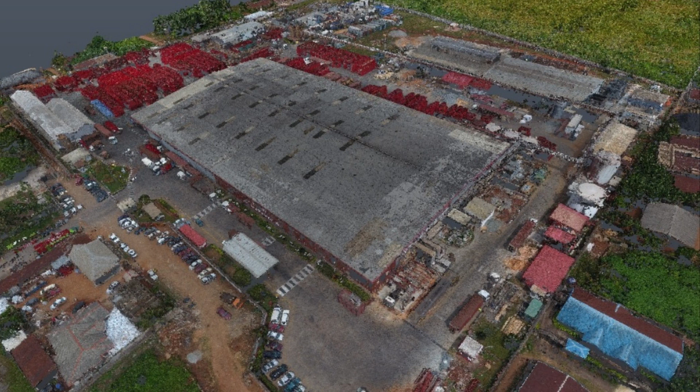The topic of this discussion is a practical BIM workflow for large-scale infrastructure projects in a pandemic situation. And we are using the Lagos to Abidjan highway corridor as a case study. Okay, so

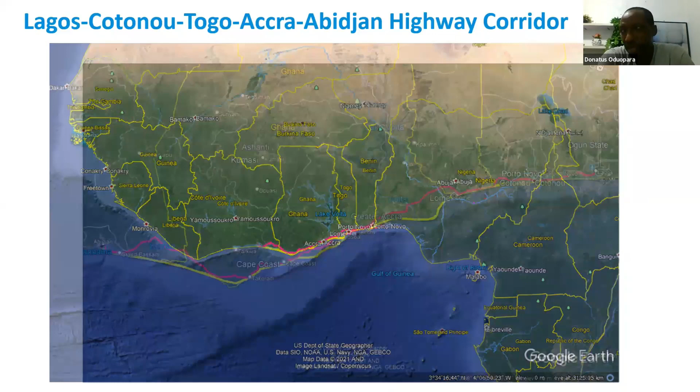Now, the emphasis here is using a method where you can stay in your office and acquire data that you can use to do the preliminary planning, without really getting to sites, after the pandemic that has hit the whole world. So we'll be exploring that. Now, to bring the method into a form that everybody will understand, I have a video that I would like us to look at.

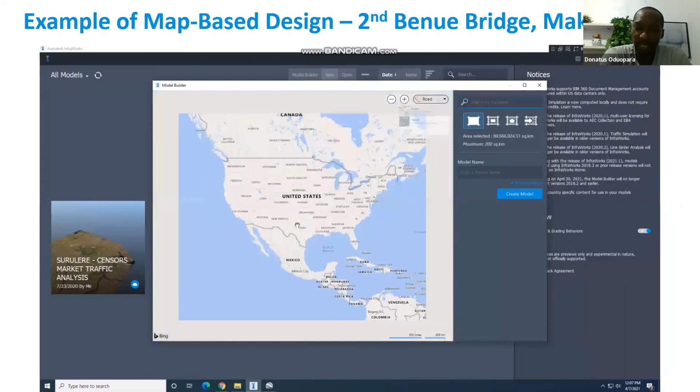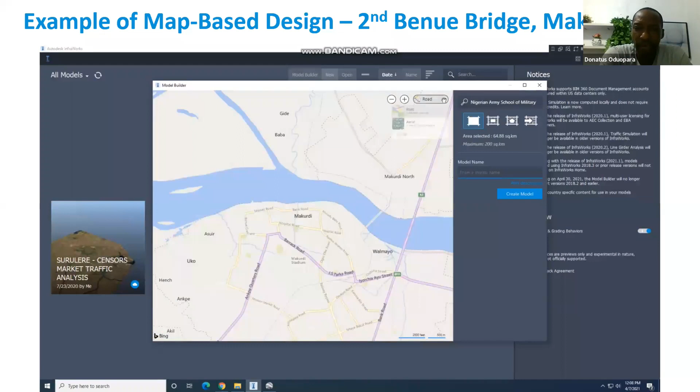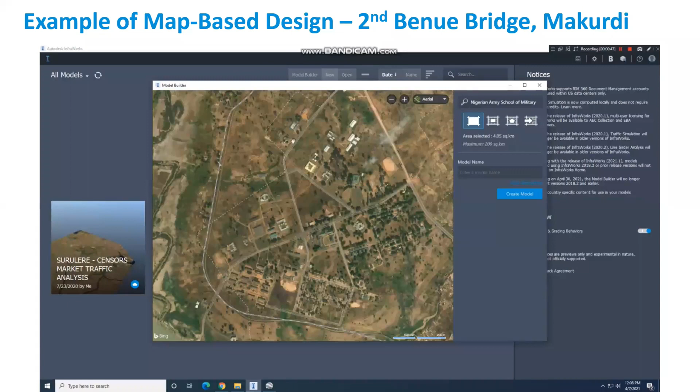So what you are looking at, the software, I will get deep into it in the course of this discussion, but this is InfraWorks from Autodesk. Now you are looking at a map-based solution, and the map you are looking at is captured around Makurdi in Benue State. And the objective is to create an alternative bridge that I will call the Second Benue Bridge in Makurdi.

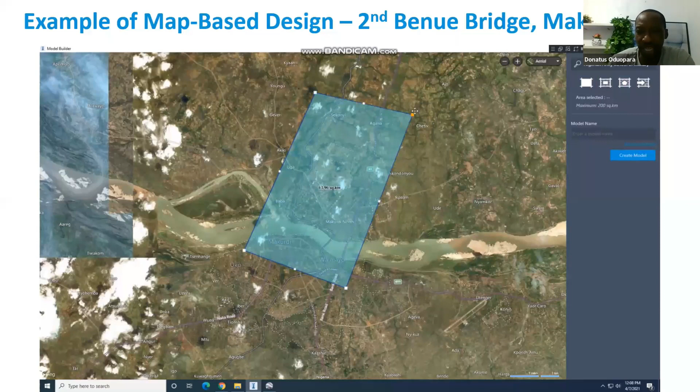So I pulled this from a presentation I made to the Nigerian Army. I used their environment, the Nigerian Army School of Military Engineering in Makurdi, to bring home what we were presenting to them. So I pulled it to explain this process in a way that we all will understand.

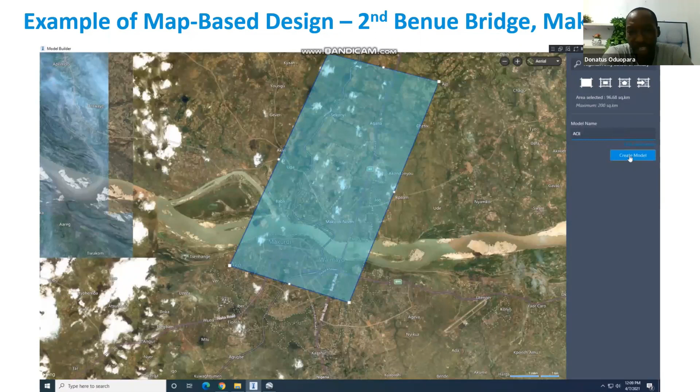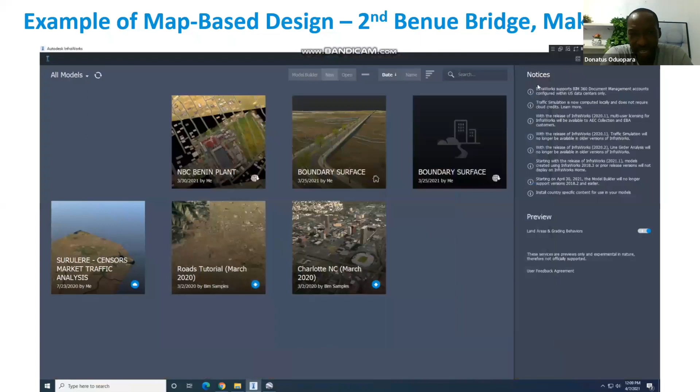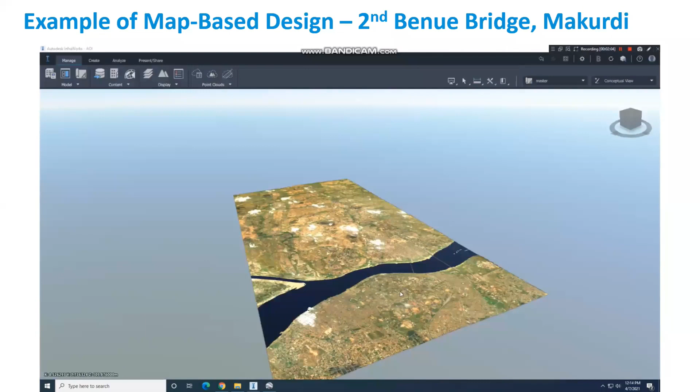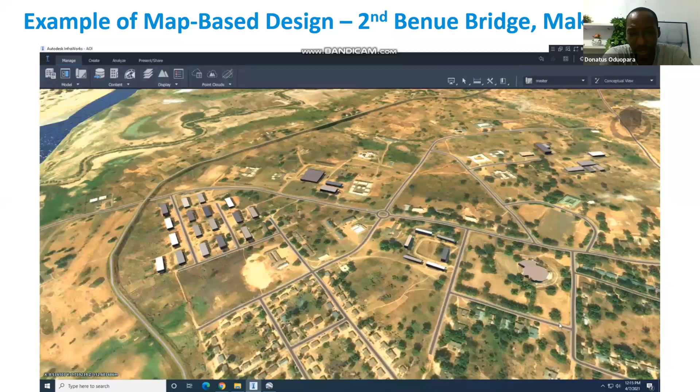If you look very closely, you will see that I am working on a map. Anybody that understands Makurdi very well will know that the map captured virtually all the existing road infrastructure in Makurdi, the railway line that passed through, and the River Benue itself was also captured. You will be seeing how the road was created and all the features that you need to put in the road.

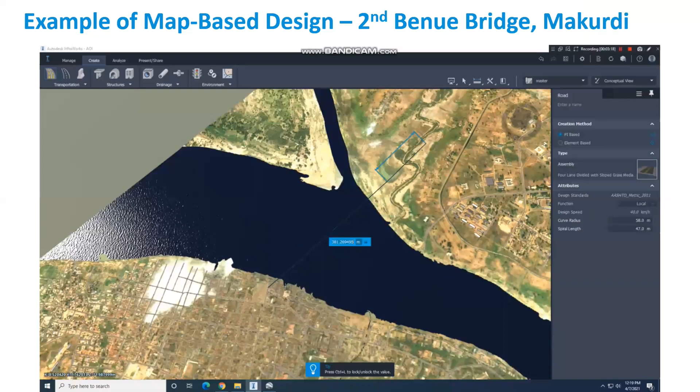By the way, this video was not edited, it was not shortened in any way. So the length of time it took to prepare this was exactly the length of time it takes. So just to give you an idea of the time and the speed of this process.

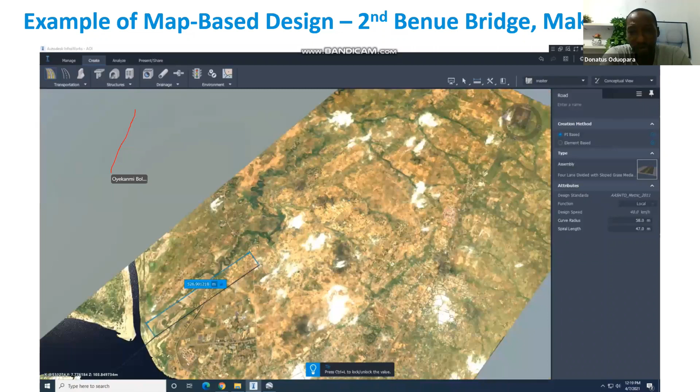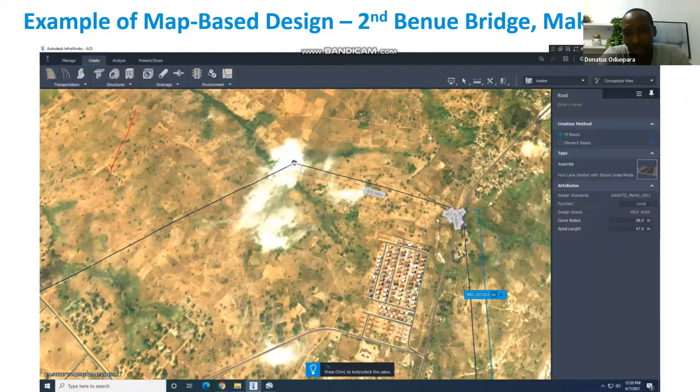So you see lines drawn from the starting point to an end point. This end point is the existing Makurdi to Lafia Road highway. So this software has captured the existing road infrastructure, and the new road that we are creating will tie to it seamlessly. Because it's coming at the same level, it's created a junction. Now you can do so many things with it.

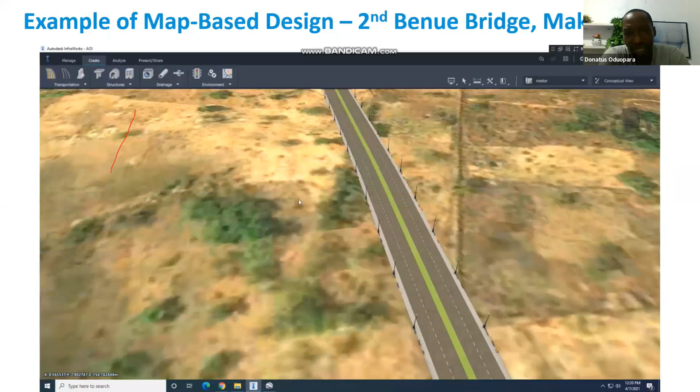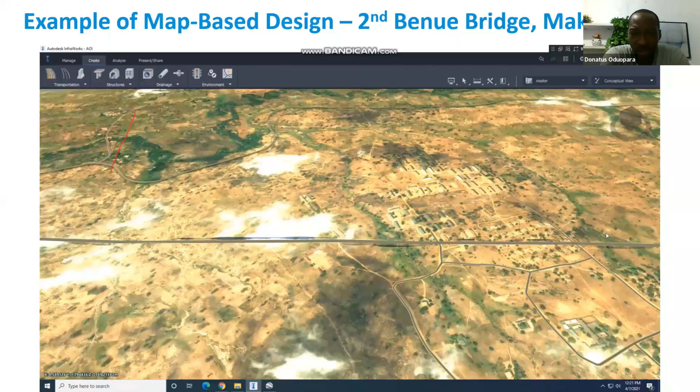The profile that we picked has a street light and other features attached to it. So it comes automatically, and you can see areas where you need to do cut and areas where you need to do fill. You can calculate your cut and fill quantities. Where we have the railway, the elevation of the railway is much higher than the elevation of the road. So the road passed under the railway. So you will see how we treated it.

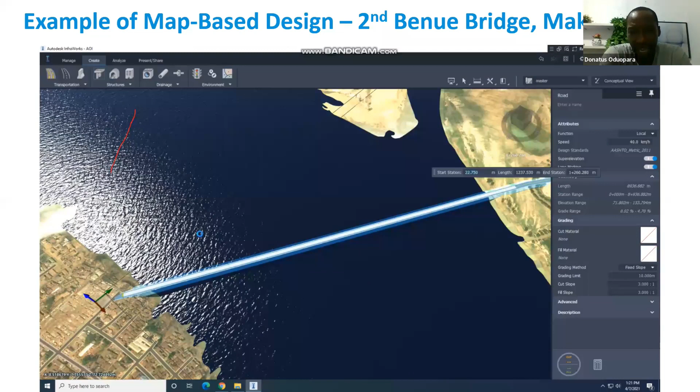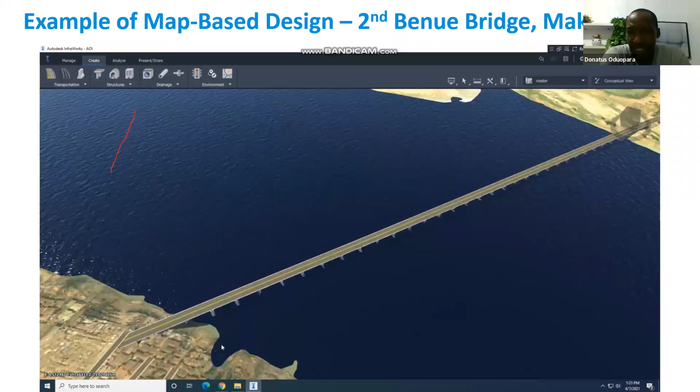Now we are creating a bridge across River Benue. By a very simple process, you create a bridge that has engineering features. Even though it's not the final design, you will still take it to another software for detailed design. But you can see how the bridge has been created. Now, remember, I didn't go to site. Nobody went to site to obtain any information. We were able to do all this.

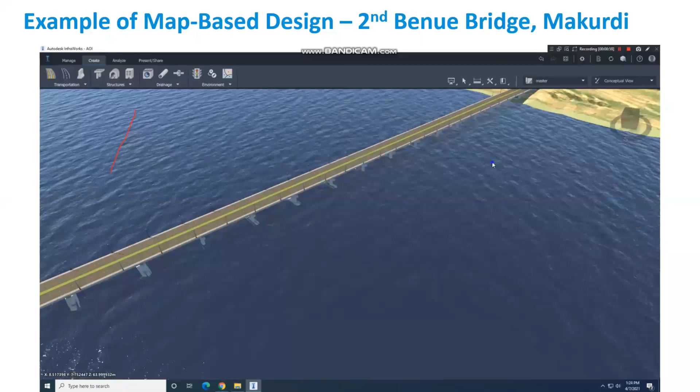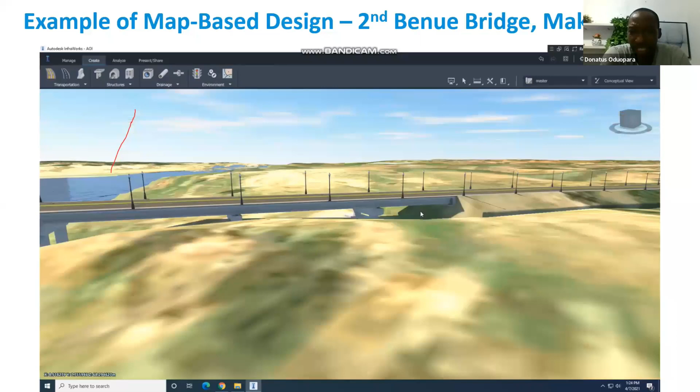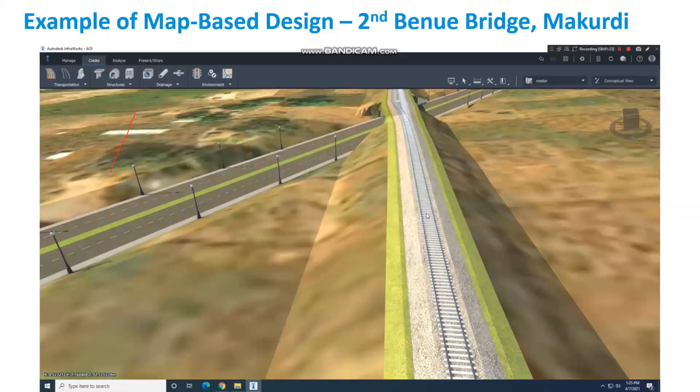This can apply to any part of the world, so long as you have a map of that place, which automatically comes with the software. So you have all the features, the piers, the abutment, and all the things that you need. This can be modified. The elevation can be changed. You can do a whole lot with it. As I mentioned, you can see the bridge and the existing railway line. Now, because the road is coming under the railway, we are going to create a tunnel so that the railway will pass above it.

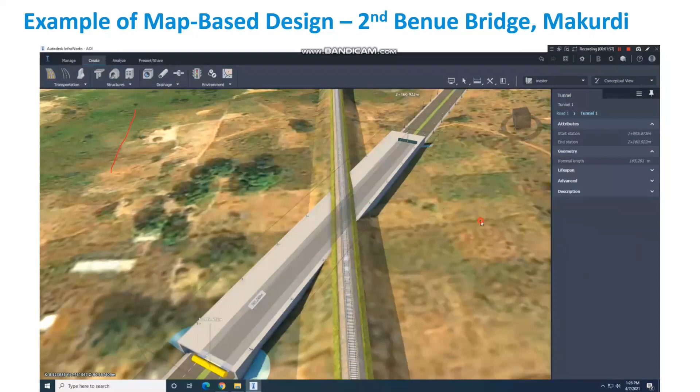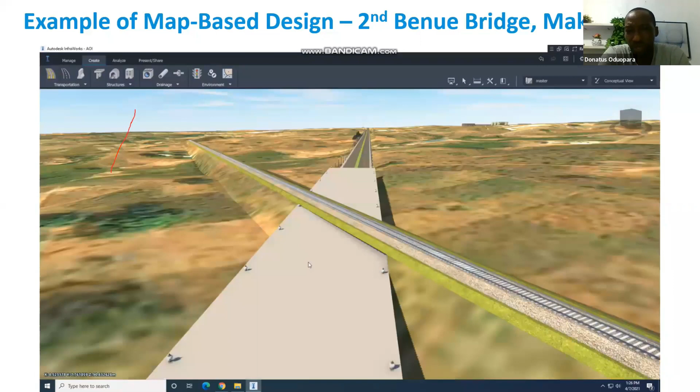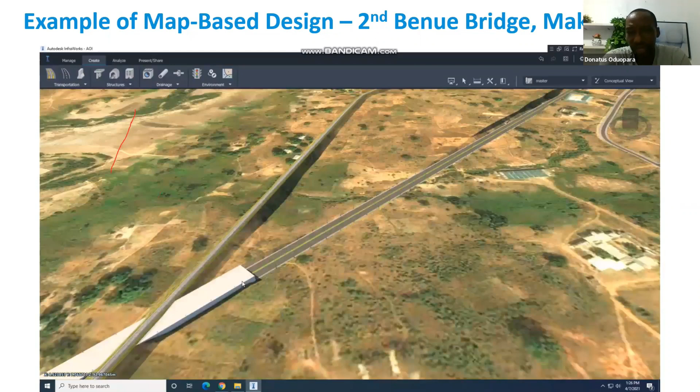And like I said, with all that we have created, you can extract your quantities and check. If you do a number of options, and that is the beauty of this discussion, that you can do as many options as possible, you can now do a quick check and do a cost benefit analysis to know which route will serve best in that situation. So this is the software that we'll be looking at in the course of this discussion, particularly for our case study.

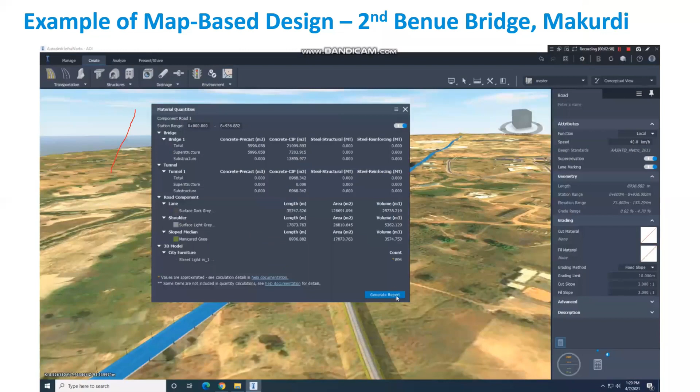So what is displayed here are basic quantities that you can pass to the quantity surveyors, and they will quickly give you some preliminary costing that will let you know if the option that you have chosen is economical. So moving on, I said this is a BIM workflow. So it is important for us to understand what BIM is. BIM is an acronym for Building Information Modeling.

Building Information Modeling, BIM, is a process that encompasses all aspects, disciplines, and systems of a facility within a single visual model that allows all stakeholders to collaborate more accurately and efficiently than the traditional process. As you will get to see in this discussion, if you are implementing BIM, there is always collaboration with all stakeholders, irrespective of your background, irrespective of your qualification. So there are features in BIM that will enable everybody to make his input at every stage of the project.

So by the way, the BIM process starts from the conceptual stage and runs throughout the lifespan of the project. So it goes into the construction stage, the post-construction stage, even at the expiry of the lifespan of the project. If you need to decommission it or to demolish it, as the case may be, BIM can be applied, because you have the model that has all the information regarding that project.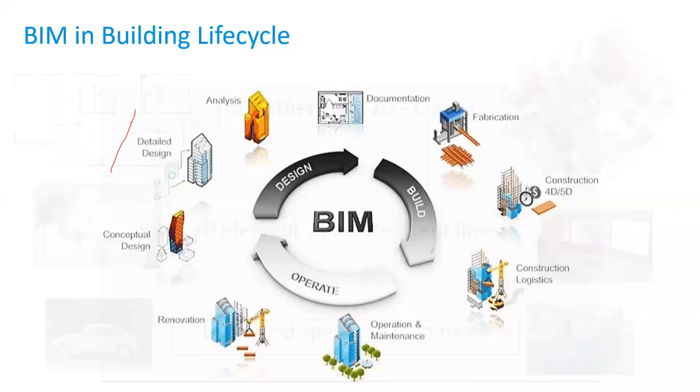So we can also explain BIM using the building life cycle or project life cycle, that you have the design phase, the execution phase, and the operational phase. All will revolve around BIM. Now, for us to appreciate what BIM is very well, let's look at some of the benefits of BIM. In BIM, you deal with 3D models as against 2D drawings that you manage in the traditional method. Even though this has brought some misunderstanding, that when somebody is doing 3D modeling, he will assume he's doing BIM. That is not very correct. But you cannot do BIM successfully without 3D modeling.

That's how it is. So if you look at the image on your right, you will understand what is in the building. So if you are presenting this to a client, the client will have clear understanding. If by mistake you have provided a column in his bedroom, he's not going to allow it, because he will see it and ask you questions. Why do I have a column in my bedroom? I don't want it. And you can manage it better at the early stages.

But if you just leave it as a dot, in the case of 2D, if you are dealing with a non-technical client who does not understand what those lines and the information you have in the drawings represent, he will come to site when you have finished the construction and tell you that he doesn't want this. And at that point, there's nothing you can do than to start to manage it. And that will lead to delay and also cost overrun.

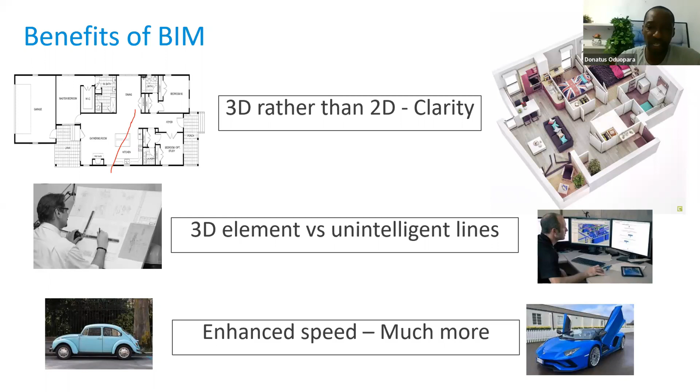Another thing is coordination. If you have a project that has so many professionals, mechanical, electrical, architect, and all other professionals, by the time everybody is bringing his own information, there is need for coordination. If you are doing that coordination with 2D drafting, 2D drawings, I promise you that even after your thorough job, you will still go to site and end up with clashes, arguments. The electrical requesting the structural to allow him to break his beams, and the structural resisting it. And this can cause delays on projects.

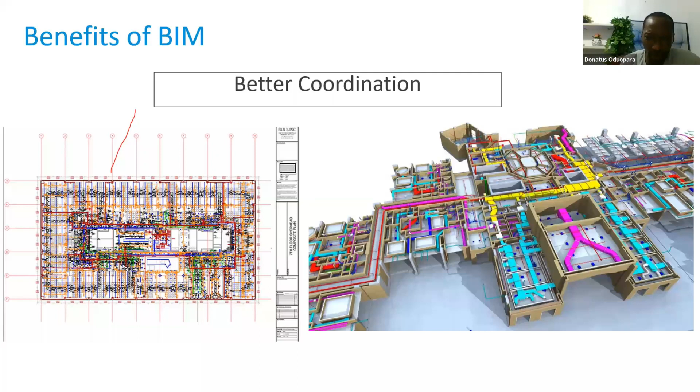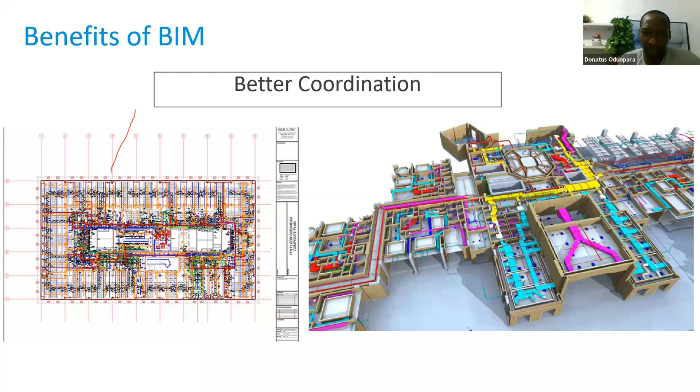In the BIM process, everything is clear, as shown on the image on the right. You can see the HVAC and all the features associated with that building. If there is any clash, there are tools you can use to run clash detection, and you will detect them and inform the people that are responsible to adjust them before you go to site. That saves a whole lot of time. That is about coordination. How about collaboration?

What happens in a non-BIM process is that architects will finish their design in silo. That means they are working exclusively in their own space. When they finish, they send it to other professionals to start their own. And they create their own, roll it back to the architect to coordinate. And you know all the issues that we face.

In the BIM process, you collaborate in real time. Real time in the sense that when the architect finishes modeling, other professionals can come in and start to work on the same model. So because you're working on the same model, there is less likelihood that you will make a mistake or do something that is outside what the architect has created.

So the point here is that you have one single source of truth. Only one model will be created. From the beginning of the project to the end of the project, at no time will another model be created by anybody, single model. But that does not mean you will not have modifications. You can have modifications and changes, but for every modification, you'll be working with the latest version of that model. And that is the single model that will be available for all the professionals to use.

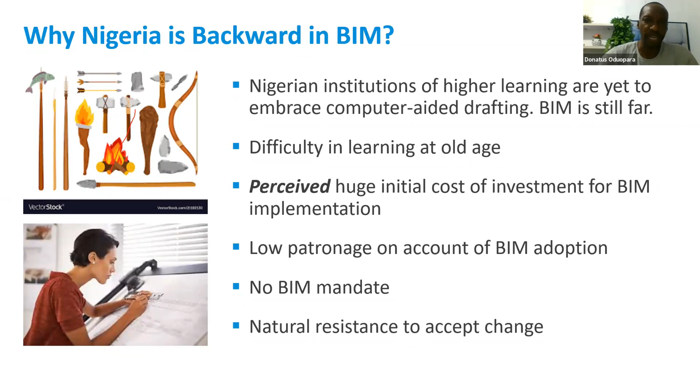Now we are going into very serious discussions, and I would like to emphasize that all the digital construction solutions that are in town are not for special people. They are for you, they are for me, they are for everybody, they are for us. And the thing is that we have to condition our mind to preach against piracy. Piracy causes a problem, a big one for that matter. You can buy AutoCAD for 5,000 naira from Computer Village and you are using it. But the truth is that you are using less than 1% of the functionality of AutoCAD, and as such, you will not maximize the benefit.

If you invest in licensed software, let's say from Autodesk, or as a matter of fact from any developer, that developer will make sure that you get the latest information, you get everything that is important about that software, including support. So when you are getting support, no matter the kind of problem you are handling, you will never fail in delivering it, no matter how big it looks.

Most of us know AutoCAD, but most people do not know Autodesk. Simply, what it means is that you have not related well to Autodesk. This applies to any other developer. It's not only Autodesk. It's a common problem here, and it's something that we all need to try to fight against at every opportunity we have.

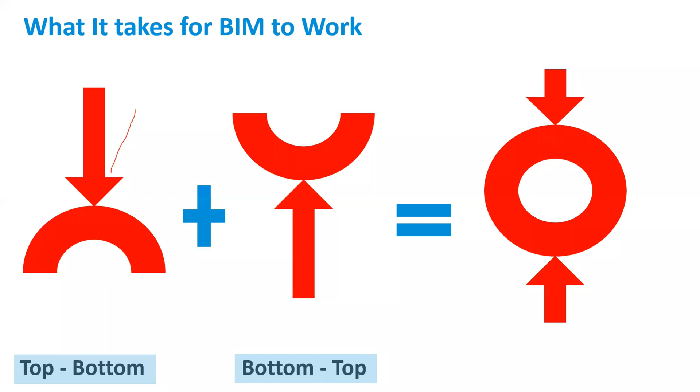As I have said before, without data, you cannot implement BIM. So let's discuss some sources of data for BIM implementation. One huge source of data is the internet. From the internet, you can pull data from different sources, some GIS platforms, and from the manufacturers of equipment and products that have created models. You can download and use it in your modeling.

Then you have the GIS, but both internet and GIS sources may not be current to the time this data were acquired. So for you to have up-to-date data, you need to deploy things like drones or 3D laser scanners to go to site and acquire current, up-to-date information that you can now use to replace whatever you have used for your preliminary design.

Co-host, I think you may have to help mute some people. I am doing that, sir. Okay, thank you. I am doing that as I am looking at the presentation.

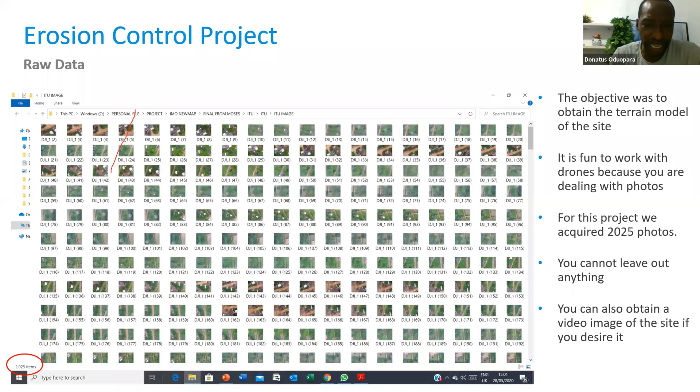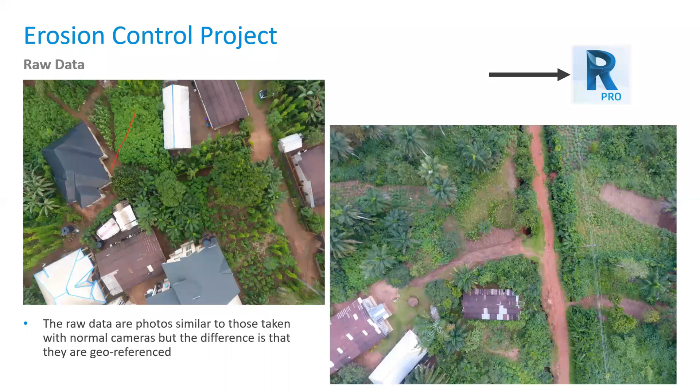So what you are looking at here is a drone that we flew somewhere, we acquired data, and all the data were processed to give you this. The raw data just looks like normal pictures, but it's georeferenced. And when you process it, it will be integrated into a 3D model, something like this. It will be like a map, and every information you need geometrically will be embedded in it.

So we are still using Autodesk solutions. Here we use Recap, I mentioned it before. Recap Pro is a tool that you can use to process drone data. By the way, it is the same drone that photographers are using, the one they use to cover events. You can deploy it on your project, use Autodesk Recap Pro to process it for engineering use. So that's what you are looking at.

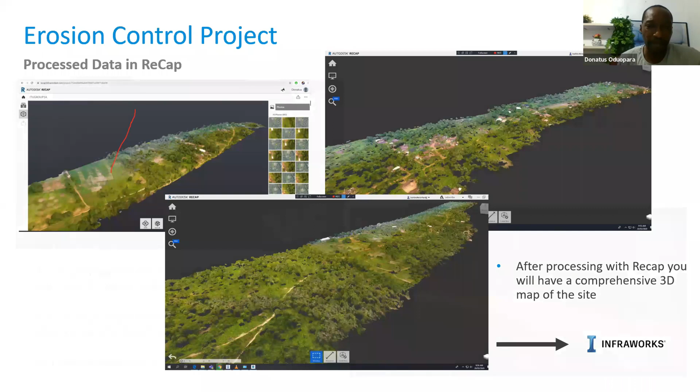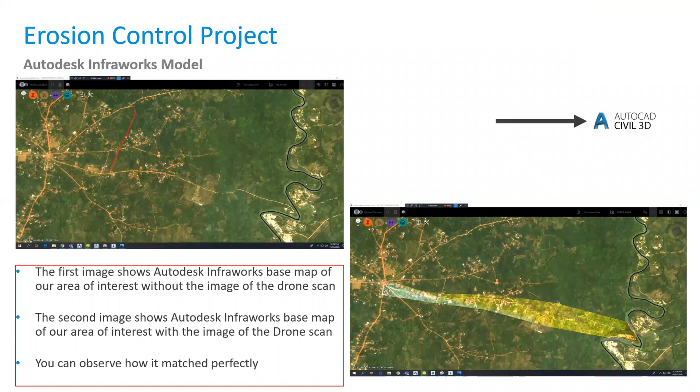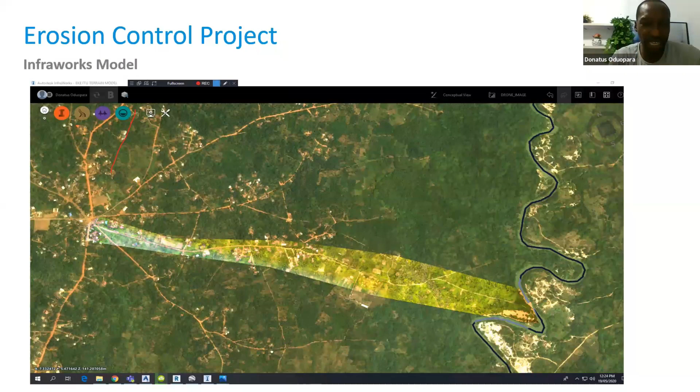So what you have here now is as existing as at the time the drone was flown. With this, you will do everything that you need to do, cut your sections, your profiles, and all that. Anybody that has somebody from Imo State, you have the Imo River on your right, and there is a place called Itu Junction, so the Imo River is on the right and Itu Junction is on the left. Now, if you process it, you can take it into Civil 3D to cut profiles, to do all the necessary engineering designs that you need to do. You have your data to do it.

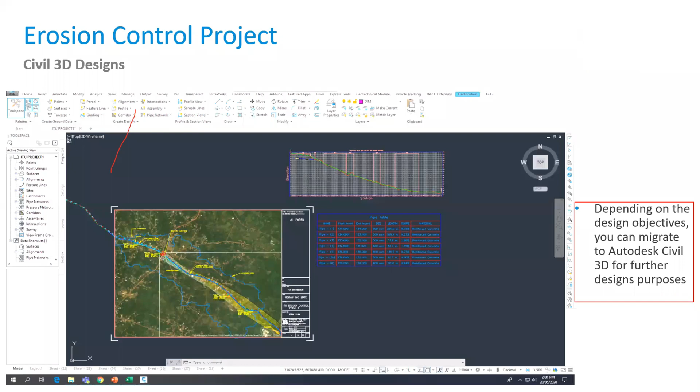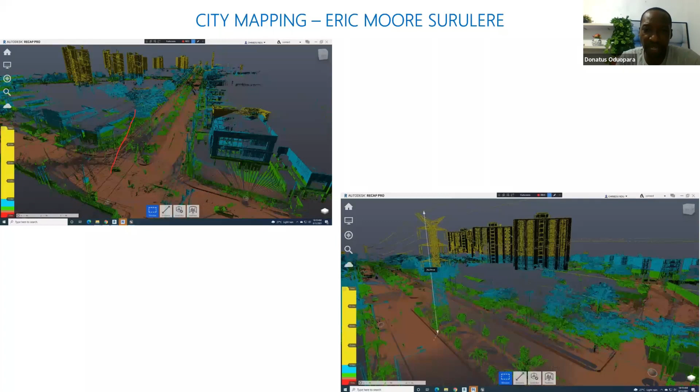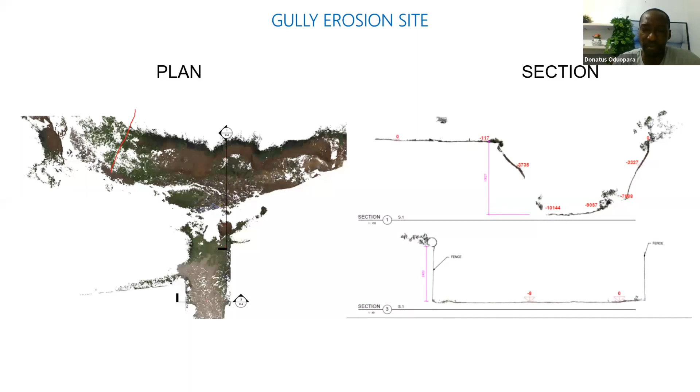So now, I've talked so much about BIM, but why is it that most people that started BIM leave it midway? They hardly get to the end, they hardly implement it. And every year you're talking about BIM. So we've identified some of the problems that we call pitfalls. And number one of them is trying to know the end from the beginning.

BIM is as large as technology. Just like you are discussing technology, you want to know what technology is, you will discuss endlessly still without getting to the end. So there is no point trying to know the end of BIM. What you do is to start from where you are. It doesn't matter where you are, there is always a way, a roadmap for you, irrespective of your level.

And then don't try to be someone else. Some people are still using board to do drawing, while some are still using computer. If you're using board, don't jump like somebody who is using computer already.

So there is a roadmap that's appropriate for you. Another pitfall is trying to learn everything. I have shown so many software. If you want to learn all of them before you start BIM implementation, that's a lie.

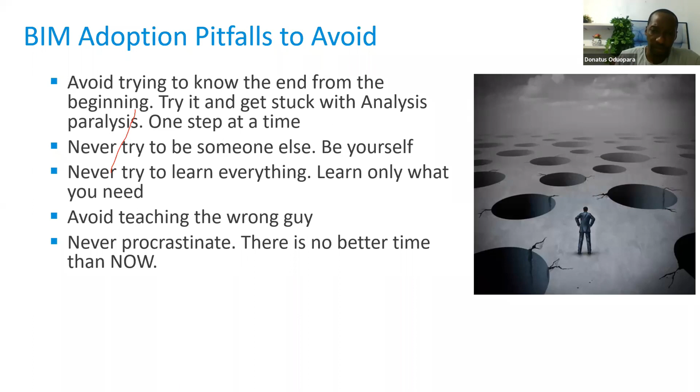Now, for us in Buildsafe, I mentioned that I am the lead facilitator at Buildsafe Academy. What Buildsafe Academy does is guide organizations, not individuals, on BIM implementation, because you have to be an organization for you to really implement BIM. So the simple thing we do is review your process, then look at a proposal that will be suitable for you. You pick a pilot project that you use to learn BIM while executing that same project, after which we review the training outcome and make sure you got all that you need. If there are gaps, we work and close them. It's as simple as that.

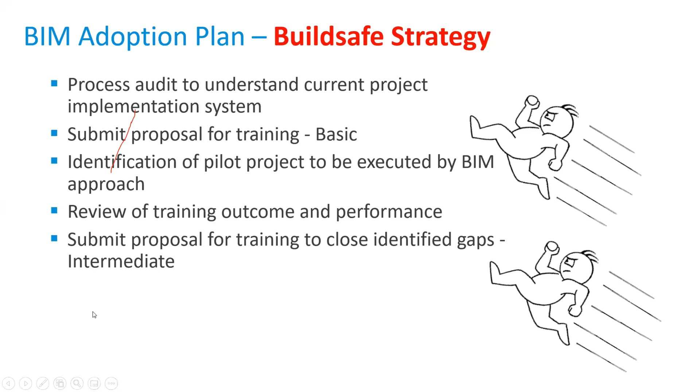Now, the big question, is BIM expensive? BIM falls under digital solutions, whether it's laser scanners or any of those things I have mentioned. The question is, are they expensive? My answer comes this way.

So my advice is, do not bring cost into consideration when you want to look at BIM adoption. I'm sure if it were about cost, an organization like Buildsafe would not even bother thinking about it. So it's not about cost, it's about personal decision and remaining focused to know what you want and going for it. I don't know if I answered whether it is expensive or not, but I'm sure that will make some sense.

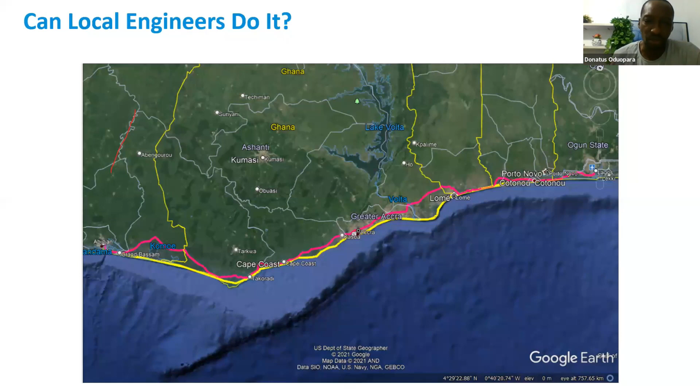Now let's treat our case study. The image you are looking at is the regular Google Earth image. We simply traced a route. I have not gone through the route, but we traced it just to show you what you can do without necessarily going to site. So we have traced two possible routes that you can use to get from Lagos to Abidjan.

Now, is this project too big for us to do? Can we do it? I'm saying yes, you can do it. Using BIM is a possibility.

We know the stages of road construction projects. You have the planning, the preliminary design, the final design, right-of-way establishment, and the construction.

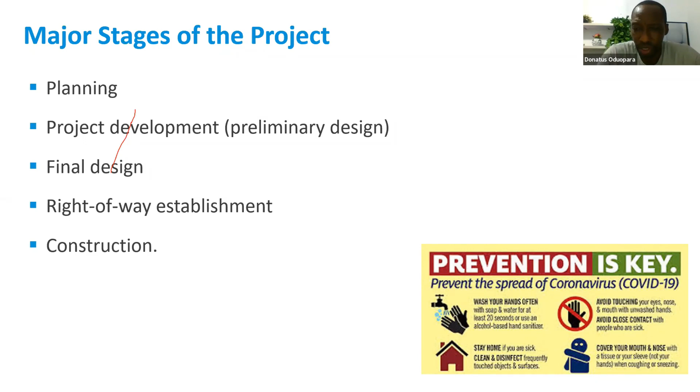We all witnessed the challenges that COVID-19 brought. It started with fear and panic, nobody knew what was happening. We entered travel restriction, total lockdown, social distancing, partial lifting, and now we ended up managing COVID-19 travel protocols, and still there are uncertainties.

Now, anything that will discourage traveling will be appreciated by any profession. So we will be looking at the considerations in selecting the suitable workflow for a project as massive as the one we have chosen.

These are some of the things we highlighted. Number one is the ability to plan and carry out preliminary designs without going to site. Number two is the ability to create and review as many routes as possible, look at the array of options, choose the most economically viable one, and select it for final design, still without going to site. Number three is to hold virtual collaborator meetings to avoid traveling and crowded meetings.

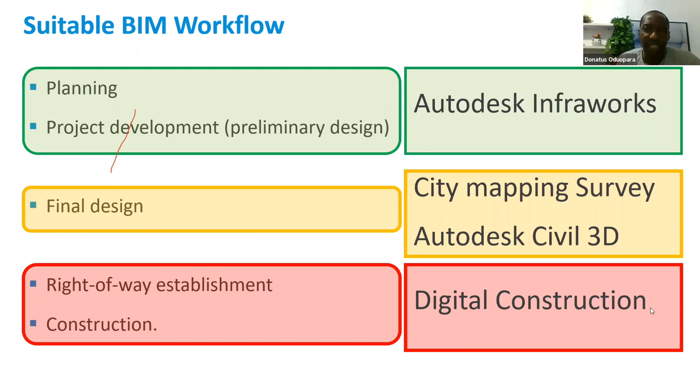So if I'm connecting to an existing infrastructure, it is important that I do some analysis and study to know the impact of the new design on the existing infrastructure so that you don't have a bottleneck. We will explain that better from our own end.

We are very familiar with Ijora, I think we call this Ijora. If you are coming from Orile to go to National Theatre, where the road coming from Costain going to Apapa crosses that road where you are coming. If you are in Lagos, you will be familiar with this place, and there is some kind of confusion that you normally have on top of that bridge, imagine an articulated vehicle trying to turn back from Orile to go back to Orile.

You need to go so many turns, move forward and backward and all that before you can turn on that bridge. Now, is that a place you want this road, a major regional road, to come and connect? So if I am doing this road, this is the first thing I will do. I will look at it and study it to know and take a decision about what needs to be done, and you will do it so that you don't finish the road and now come and face a major challenge of heavy traffic.

So we've highlighted the important areas. You have the road coming from Eric Moore, connecting to it. You have the road from Mile 2. You have from Costain going to Apapa, and then National Theatre on the other side. Now, the beauty of this workflow is that you will be able to see this even before you go to site to do survey.

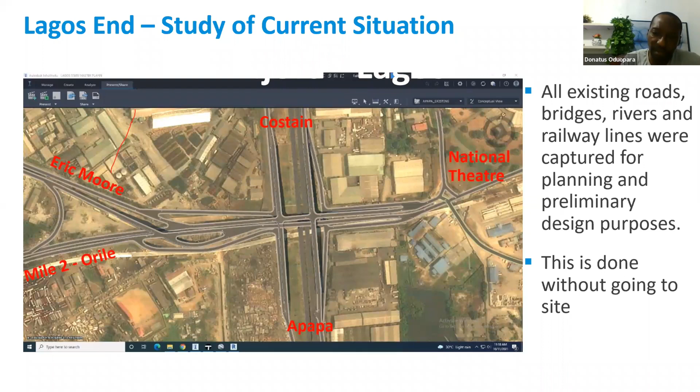And having looked at that, this is showing it in 3 dimensions. Now, what I will do as part of the process will be to redesign that junction or interchange to a more efficient interchange. So you are doing this still without going to site. So here we have demolished the existing road infrastructure. That means we have removed them from the drawing or from the model. And this is what we came up with.

So if you take your time to look at it, you will see that all the vehicles can go seamlessly without distance. So we are still within InfraWorks environment. Now, if you do this and review it with all the stakeholders, you are reviewing it because it's going to impact on so many things. And even without going to site, you would have seen all the things that will be affected. And you can do some analysis to understand what the cost impact will be.

So if all the stakeholders review it and agree that this is what needs to be done, when you now do your data capturing on site, you will get the correct information. And if anything is omitted, if anything is not shown properly, you will obtain that and then sort it out in your final design. So with the 2 instances that I have shown, both from the Lagos end and the Abidjan end, you can do this throughout the entire route.

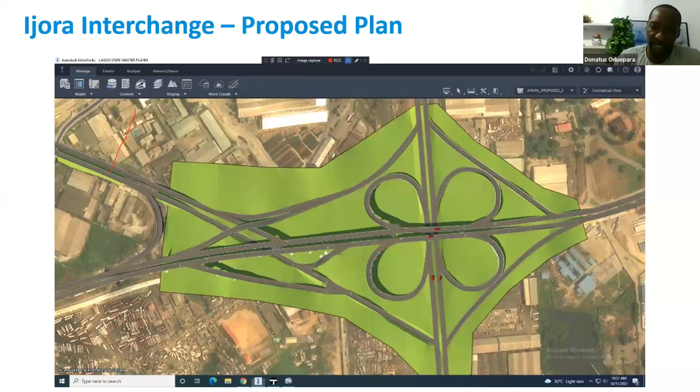Where you have a water body, you provide a bridge to cross it. So some of the things you will be doing will be to know the number of bridges, the number of culverts that you will have for every route that you have picked, or you have tried, or you have proposed. And from there, you can determine the cost of each of the options and make the best decision. So this shows the bridges and how all the roads connect with one another. Once you are done with this, you can move it into Civil 3D for your detailed design.

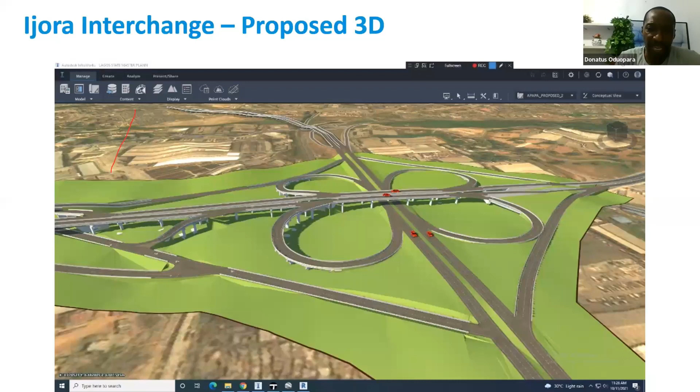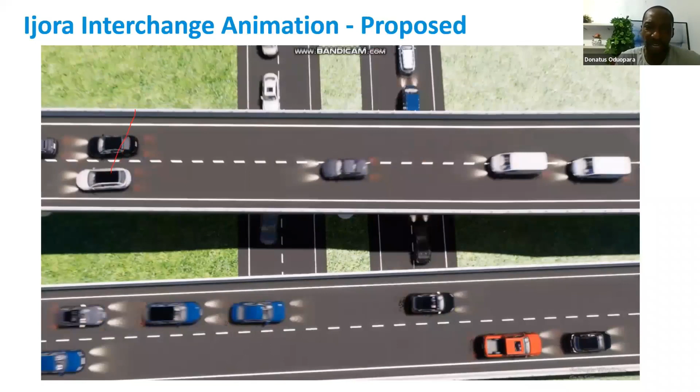Now I have a simple animation, it's just representative, showing how the traffic will move by the time you finish your design. And I'm sure if we have this kind of, it's something that everyone will really appreciate.